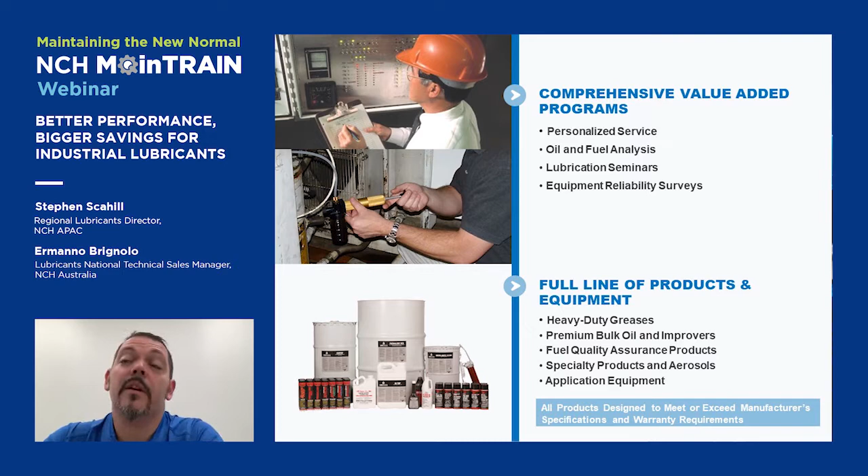And we have some specific products designed for specific applications, and also some application equipment to apply those products to your machinery. We work with a number of different companies that go from excavation, demolition, to concrete, asphalt, mining, quarrying, manufacturing, agriculture, up to something a little more demanding as well, like your food manufacturing, your steel mills, your refineries, paper mills. Pretty much everywhere there's a need for lubrication, we have solutions that can help.

But if you put it under a microscope, all these little asperities become evident. And those asperities sliding onto one another will create what we perceive as friction. Friction is therefore defined as the resistive force that must be overcome when two sliding surfaces or rolling surfaces get in touch with one another.

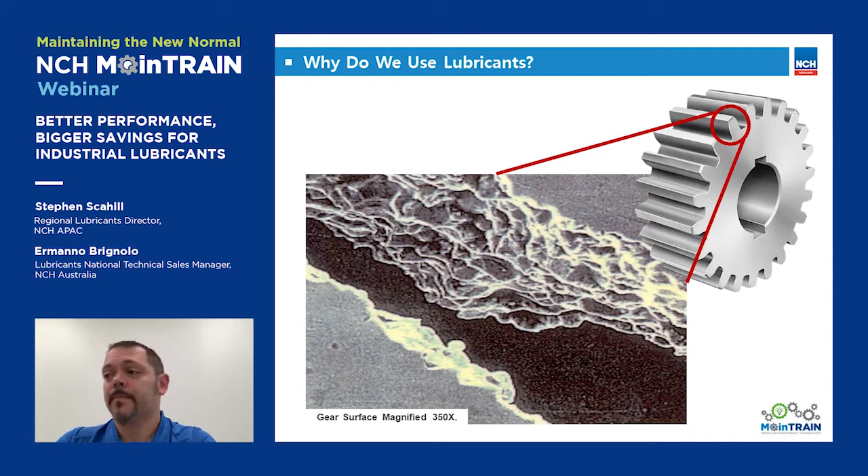Now, friction is not always bad. There are some aspects in everyday life where friction is actually pretty good. Without friction, for example, we cannot walk or we cannot hold a glass. However, in an industrial setup, friction typically is quite bad. Most importantly, its byproducts are quite bad. So let's have a look at how friction becomes a problem.

First of all, there are three different kinds of friction. There's sliding friction that happens when two surfaces are sliding one across the other. There's rolling friction that happens when the surfaces are rolling one on the other, for example, when a cylinder rolls onto a table. And then there's a combination of these two, which is very, very frequent when you imagine, for example, a gearbox.

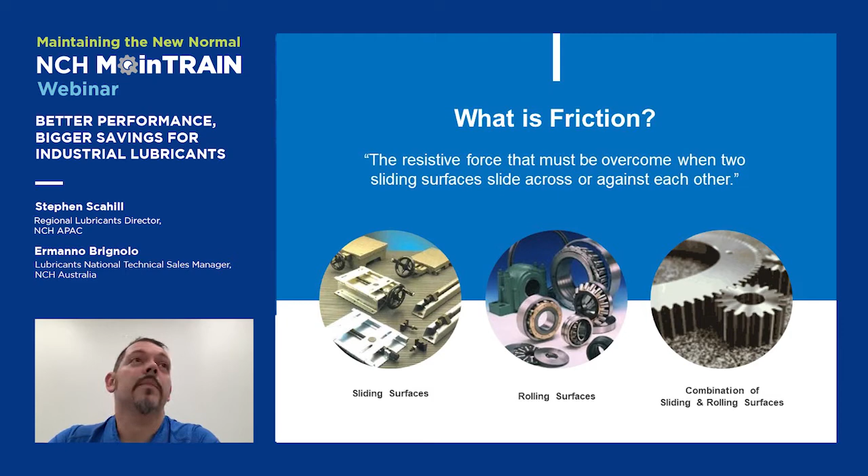Now, there are a few factors that determine how friction is developed. There's load. The higher the load, the higher the friction. There is speed. The higher the speed, the higher the friction. The finishing of the surfaces: the rougher the surface, the higher the friction.

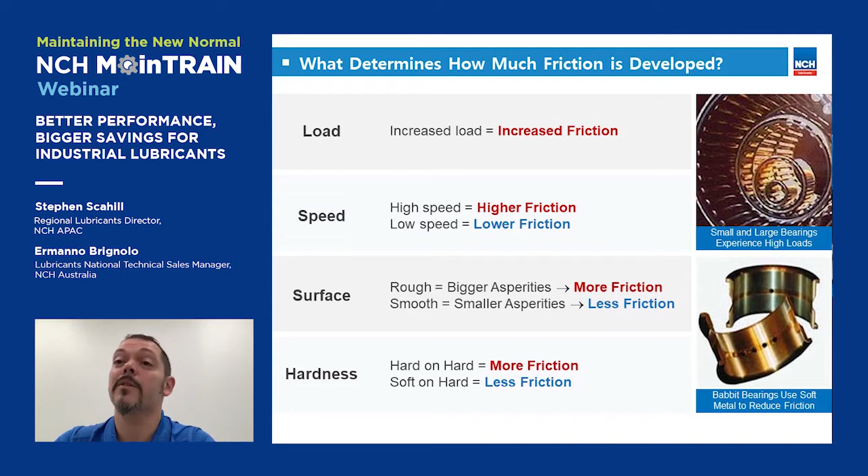And also the hardness. You often have applications where you have two different materials, and definitely the softer material will always wear way before the harder one. And some components are actually designed with that very purpose in mind. So as we said, the problems are the byproducts of friction, which are wear and heat. So let's analyze how these happen and how we can handle them.

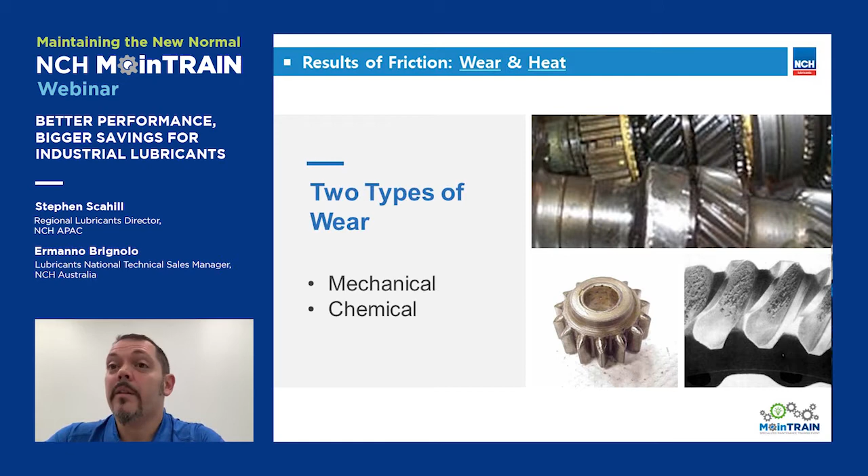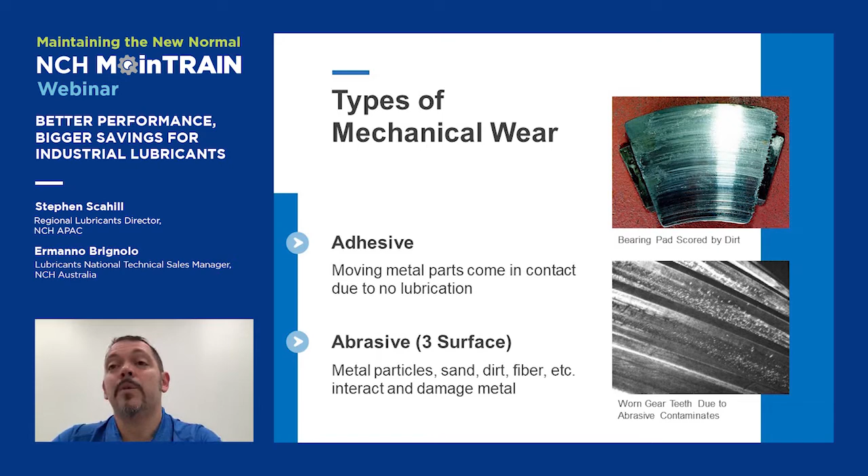Let's start with wear. Wear is divided into two categories. There's mechanical wear and there's chemical wear. Let's see the mechanical wear first. Mechanical wear, again, is divided into two categories. There's adhesive wear that happens when you have two surfaces in contact with one another, and the friction is so high that they actually become glued together. And then there's abrasive wear when you have three elements, the two original surfaces and some contaminants from the outside getting trapped in between and creating a lot of wear, as you can see from the picture.

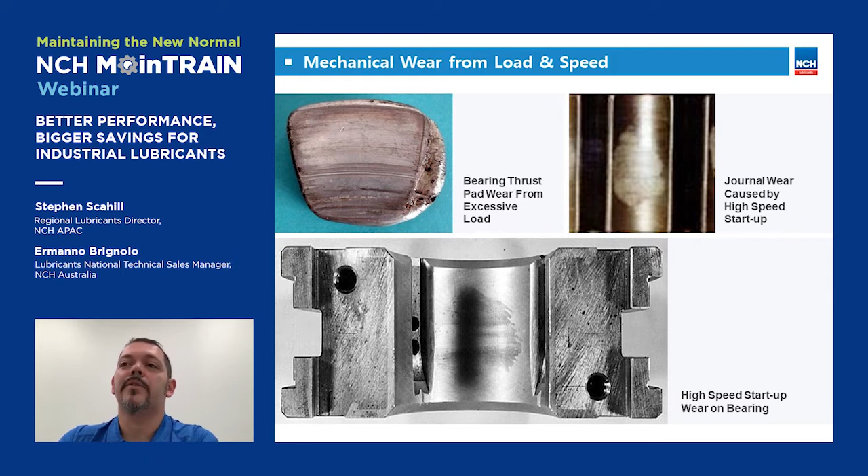And then we move to chemical wear. Chemical wear happens when some chemistry in the lubricant starts to deteriorate and become slightly different. And again, you have two different kinds of chemical wear. There's external chemical wear that happens when some contaminants from the outside get into the oil, for example, and start creating some unwanted effects like rust and corrosion.

And then we have internal chemical wear. Specifically, we're talking about oxidation. Oxidation is a natural phenomenon. It happens when you heat up your oil and sulfur starts to get released in the air. And sulfur mixes very easily with oxygen, creating a gas. The formula is SO3, or sulfur trioxide.

It's not a hazardous gas. It just smells funny. It smells like rotten eggs. And when you start smelling that, usually that's a sign that something bad is starting to happen in your oil. As I said, sulfur trioxide is not bad per se, but it mixes very, very easily with water. At room temperature, it mixes with water and it turns into H2SO4, or sulfuric acid. Now, sulfuric acid is really bad.

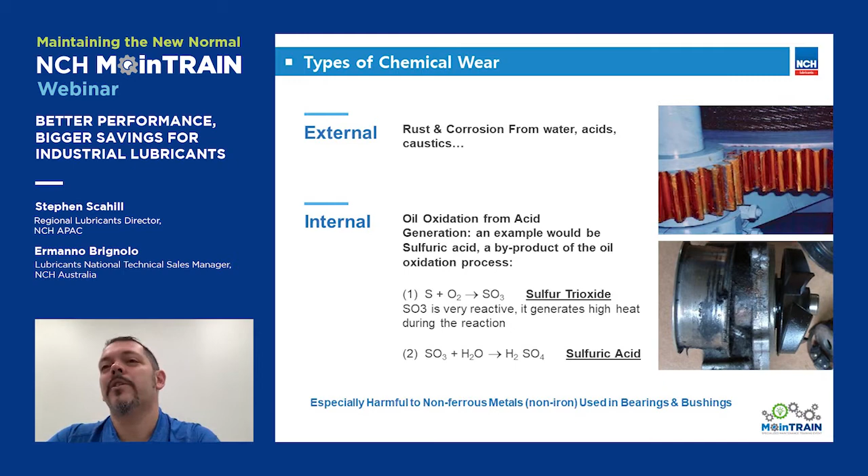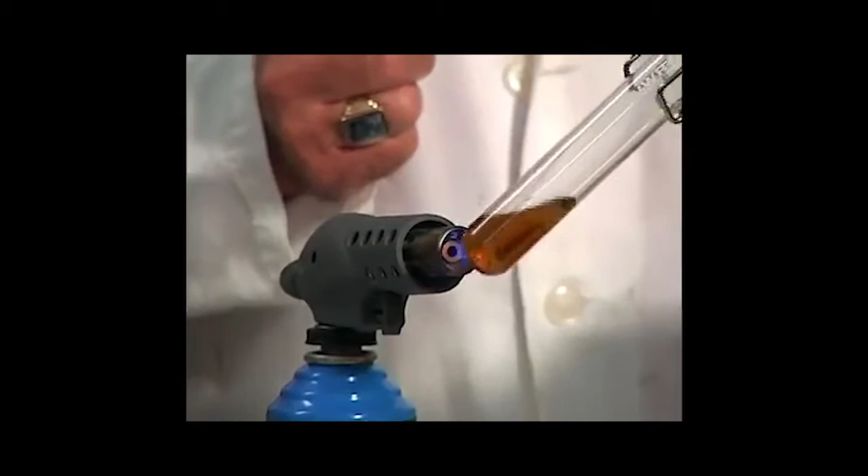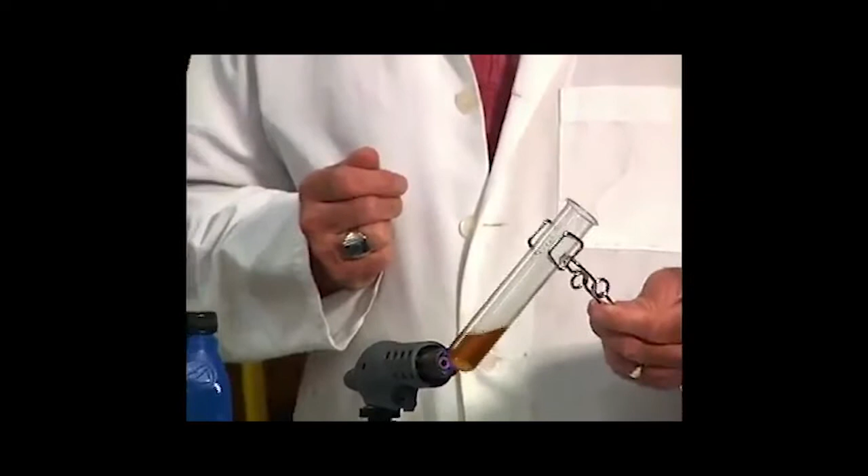And the first thing we're going to see are some bubbles. The oil is doing its job. It's trying to carry the heat away from the source. The second thing we're going to see are light wisps of smoke. This is the lighter fraction of the oil cooking off, going off through the catalytic converter and into the atmosphere. The tree huggers call this NOx and SOx. You and I might call this add oil.

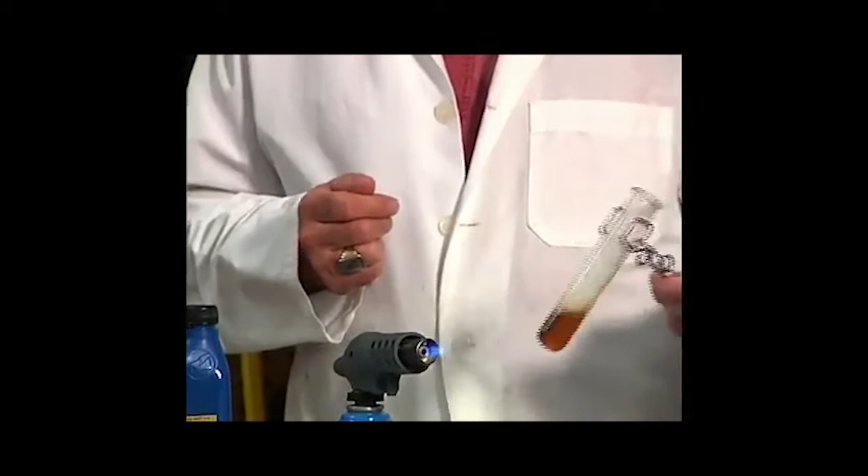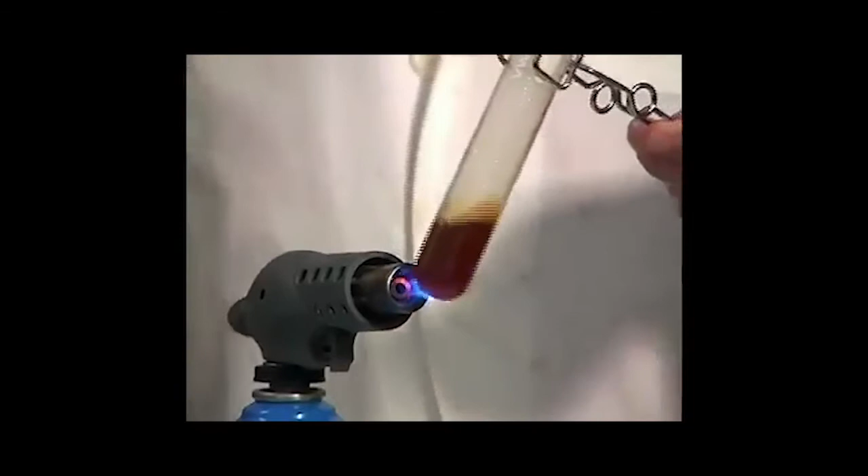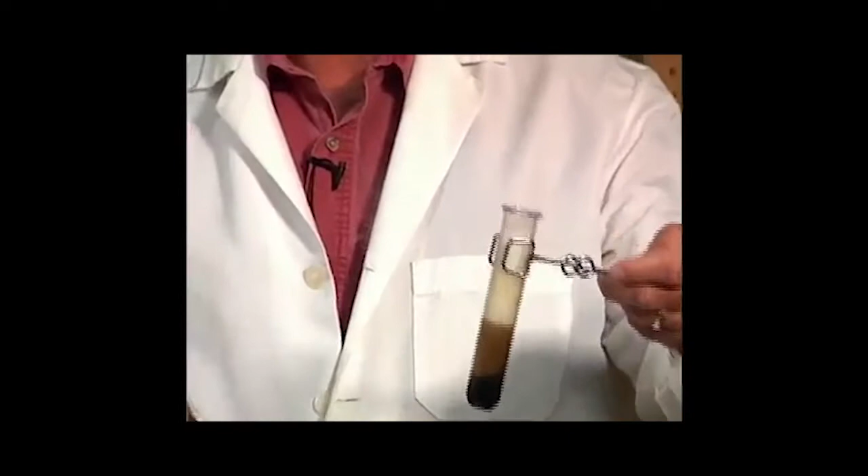As these lighter fractions roll off, it leaves the medium and heavy fractions of the base stock, and then the oil starts to oxidize or thicken. But really, not a whole lot is happening to this oil outside of a little bit of smoke and color. But watch what happens when I add the contamination. Once that oil has expanded and contracted, it's lost all of its alkalinity. So this is how oxidation happens on a very fast scale.

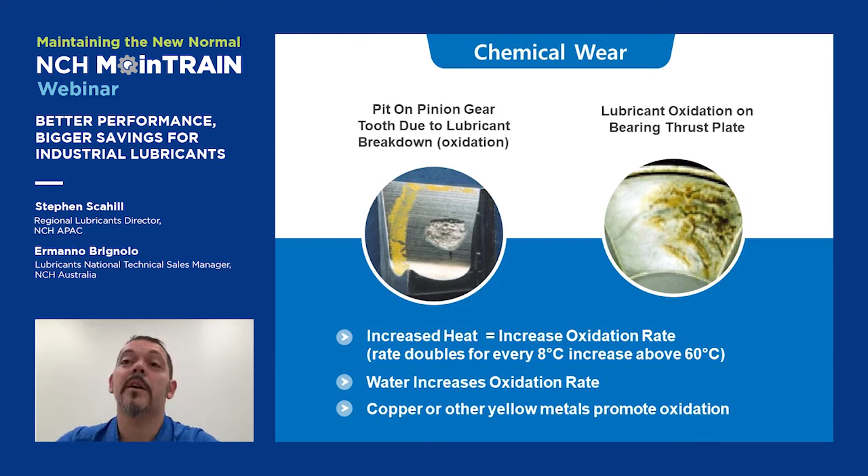Now, we spent a lot of time talking about oxidation, and we said that oxidation comes from heat, and heat is another byproduct of friction, as we said before. So let's have a look at how heat is developed in our system, where it comes from, and what it can create in our systems. First of all, we have 4 types of heat. We have ambient heat that comes from weather, and there's very little we can do about it. There's operational heat that comes from the kind of operations we're running.

If we run a steel mill or if there's a very powerful motor, then temperature is going to be very high. There's frictional heat, which is what we said before. It comes just from friction. When you rub 2 surfaces together, they will heat up, and that heat gets translated onto your lubricants. And then there's heat coming from the load that you have. The higher the pressure between 2 surfaces, the higher the friction, and therefore the higher the heat that can be developed.

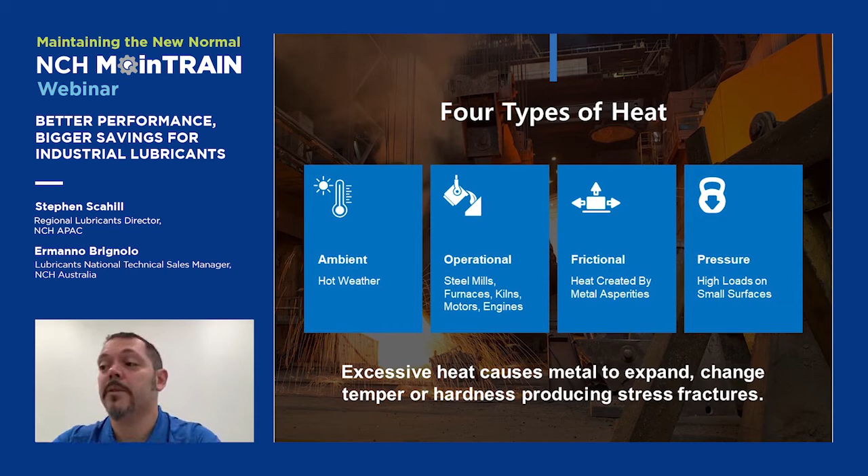And heat itself can also create some problems of its own, like a deformation on the metal. Metal can expand or contract at variation of temperature. And it can heavily oxidize some thin films of lubricant and make them adhere so strongly to the surfaces that you will need to either grind them away or replace the components altogether. So these are all the problems that the byproducts of friction can create in our system. And we said at the beginning that a lubricant is used to reduce friction. So let's see how a lubricant can do that.

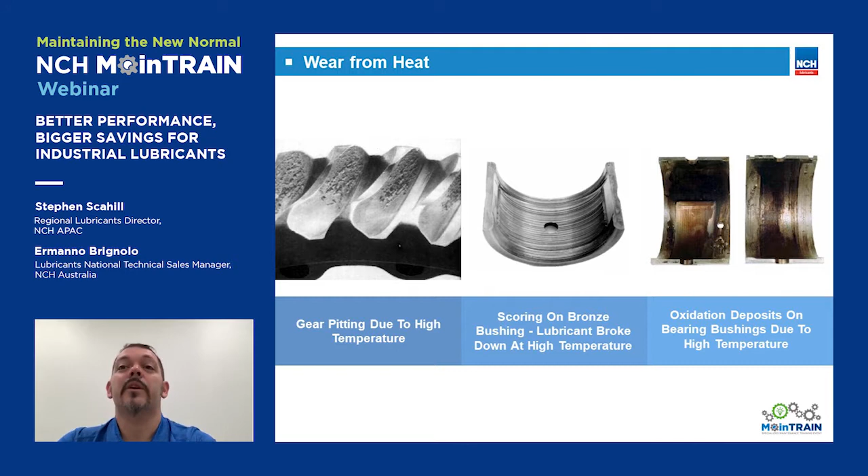From a physical point of view, a lubricant is any substance that can create a barrier between 2 surfaces, and therefore it can separate these 2 surfaces from getting in touch and developing all the friction between one another. And therefore, by doing so, a lubricant also can cover a number of different roles in a machine. Let's have a look at what it can do. First of all, a lubricant is designed to reduce friction. All of them are involved in reducing friction. The first line is quite obvious.

There are some lubricants, though, that are specifically designed to absorb and dampen the shocks, and we are specifically talking about greases and gear oils. Some lubricants are designed to carry the heat away, and of course we're talking specifically about coolants, for example. Some others are designed to prevent rust and corrosion. Every time we see that R&O symbol on the drums or on the boxes, we know that there are some rust and corrosion inhibitors. That happens with almost every one of them.

One lubricant is specifically designed to seal out dirt and contaminants, and we're talking about grease that can create a barrier around our equipment to shield away this kind of action. And there's also one lubricant, well, some of them are involved in this, but one specifically is designed to act as a flushing agent, to keep our system very clean and efficient, and that would be engine oil. Even though, admittedly, all the lubricants that go through a filter have a role in keeping the system clean. And finally, there's one that is designed specifically to transmit power, and that would be hydraulic oil.

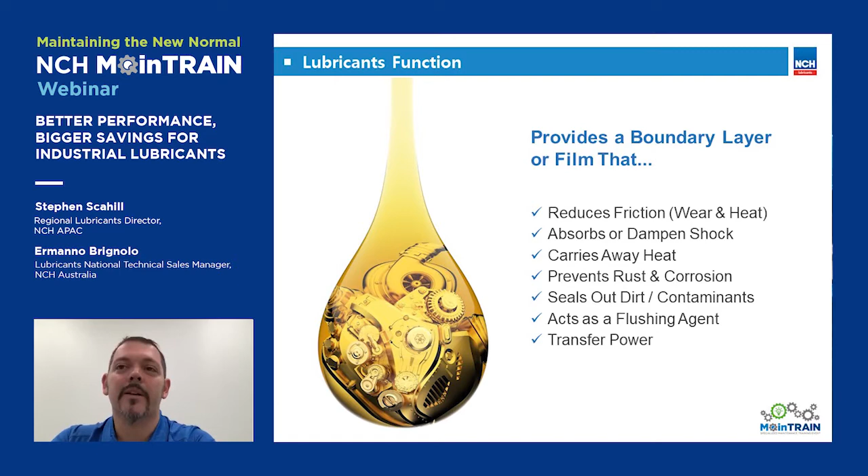So at the end of the day, we are asking our lubricants to do a lot of things, and by doing so, we realize that they are crucial and critical in keeping our equipment efficient, reliable, and highly operational. With that in mind, let's have a look at the process that we have in place to select the right lubricant and the right lubricant supplier. There are many options here that we all are familiar with. The first of which is use the cheapest available.

Now, there's nothing specifically wrong with this, apart from the initial idea, which is reducing a lubricant to a commodity. And based on what we just said, which is heavy responsibility in keeping our machines going and our plant efficient, treating it as a commodity probably is not exactly right. And then there's the OEM recommendation. All the equipment that we have in our plant has an OEM recommendation about the lubricants. And there's nothing specifically wrong with it, again.

The problem is that some of us are still running plants that are probably 10, 15, 20, even more years old. And therefore, that OEM recommendation has been written 10, 15, 20 or more years ago. That means that it doesn't take into account all the technological development that happened during these years. So let's have a look around and see if there's anything better that we can do to keep our machines running.

The famous one, go with what's always been used, which translates into, if it ain't broken, don't fix it, which is fair enough. But I prefer to rephrase that into, if it ain't broken, don't forget about it. As we said before, there's always a chance that we can do something better. So let's keep our eyes open for something that can help us achieve a better result. Use the corporate suggested product.

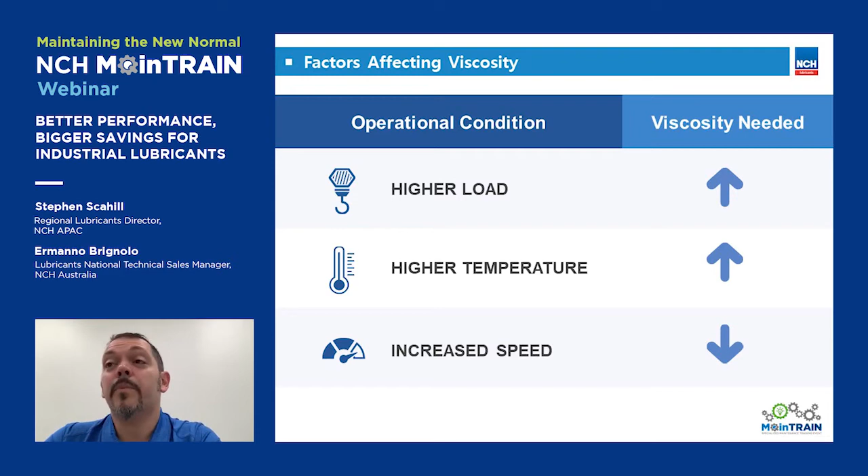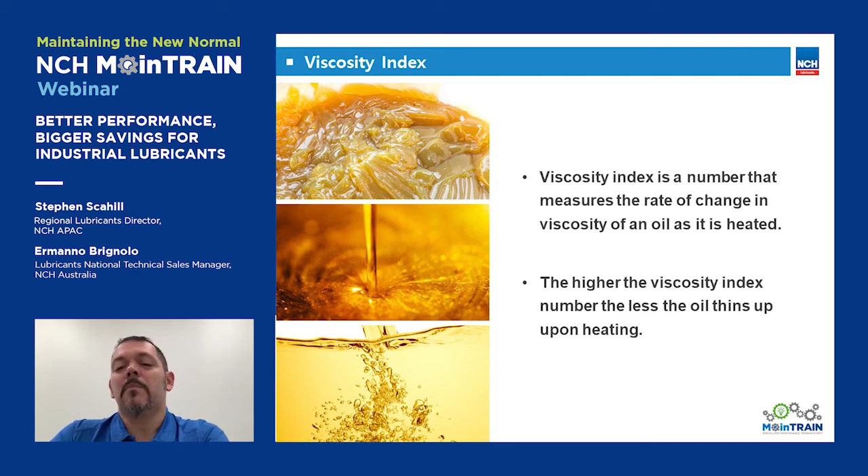Apart from viscosity, there's another parameter that often is disregarded or neglected altogether, but it's very, very important in defining the performance of our oil. It is the viscosity index. Now, let me be clear on this aspect. Viscosity index is a number. There's no unit of measure, and it's a number that defines the ability of an oil to keep the viscosity within a certain range while the temperature changes. So the higher the viscosity index, the smaller the variation will be in the viscosity grade.

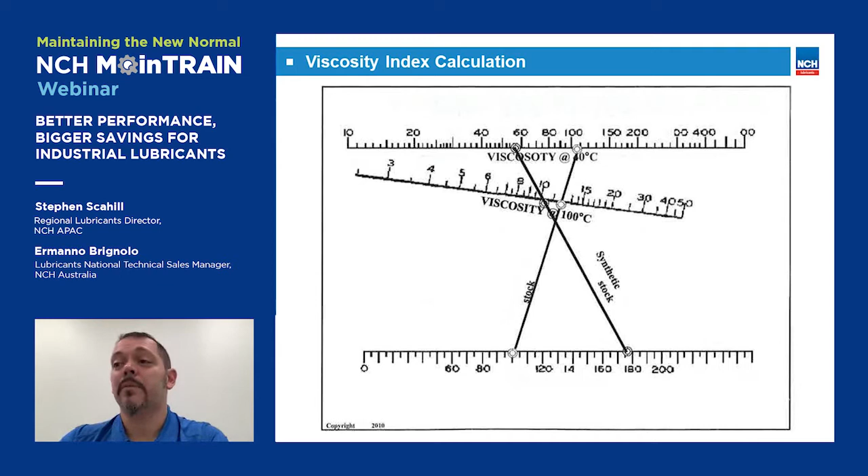Now we finally go into the analysis of the base oils, which are the foundation of all our lubricants. And as we know, base oils are divided into two big categories. There are mineral base oils and synthetic base oils. So let's analyze for a moment the difference between these two.

Now, what we extract from the ground, the crude oil, is of course not usable directly as it is. It needs to undergo a quite complicated process that we're going to see very briefly. Now, crude oil cannot be used as it is when it comes out of the ground. That's why we have refineries. They are those big plants with high towers and fires burning on the top of the towers.

Crude oil goes into the plant, gets boiled up, and then the gases coming from that furnace get condensed at different temperatures. What comes out at 260 degrees from the atmospheric distiller then goes into the vacuum distillation process, and from that we extract all of our lubricants, our heavy oils, our light oils, our synthetics, and even some gases that then will turn into lubricants again.

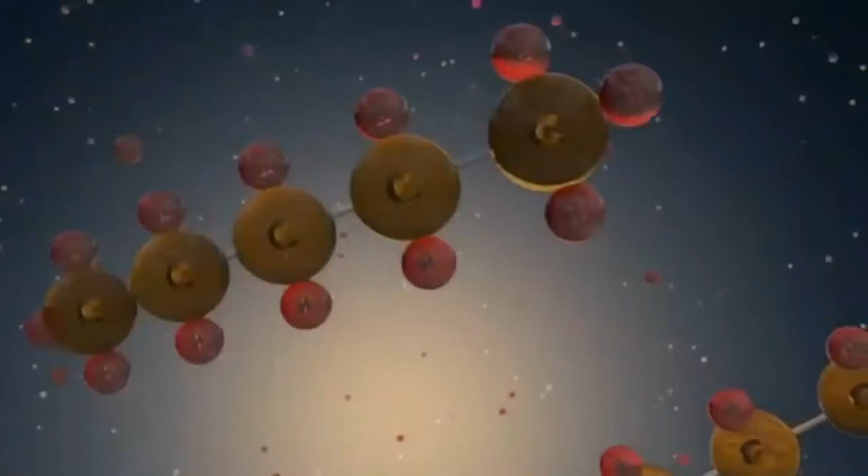And then what comes out of the vacuum distillation is divided into groups or categories based on two parameters, the sulfur content and the viscosity index. And these are the differences between our minerals and our synthetics. We have 7 groups of lubricants, of base oils. Groups 1, 2, 2 plus, and 3 are typically our mineral oils, which have a relatively low viscosity index and a high sulfur content.

And then group 3 plus, 4, and 5 are our synthetics. Very difficult to make distinction between groups 3 and 4, but the important thing is synthetics are all with a very high viscosity index. And again, let me stress that they all come from petroleum, from the crude oil.

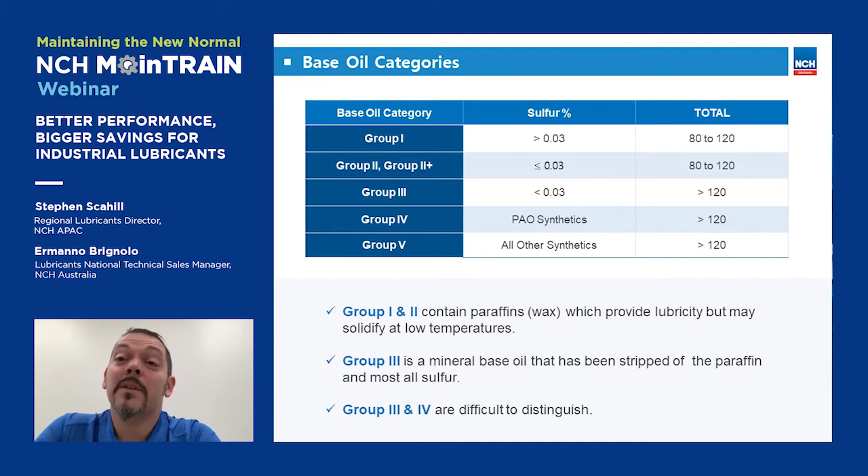Now there's a sort of a myth or a common conception that synthetic oils are always better than minerals. Let's see if that's exactly true. There are some distinct advantages in using synthetic base oils. It is true that there are some advantages using synthetics, yes.

Specifically, synthetic oils have improved thermal and oxidative stability because they have a higher viscosity index. And they also have a higher viscosity index, so this is a bit of a loop. And finally, they have improved extreme temperature properties because they have a higher viscosity index.

On the flip side, though, they are also very expensive because it's much more complicated to process them and to refine them. They do not provide the same lubricity as mineral oils, and they cannot use some performance additives that are crucial for some operations. And finally, they tend to emulsify with water very easily. So you need to keep them extremely dry. Otherwise, you will have a nice pot of milk instead of a nice reservoir of oil.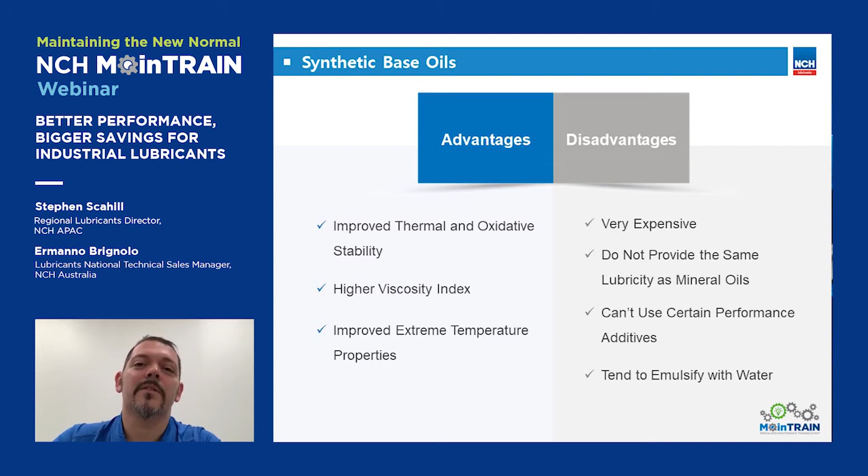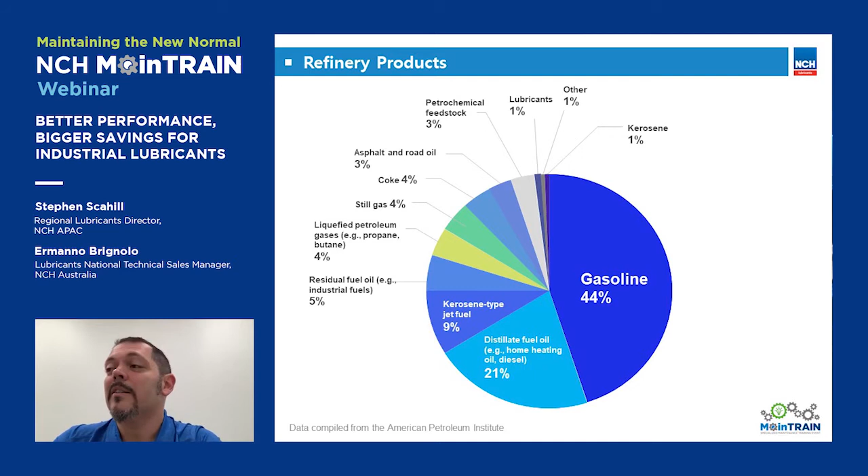And finally, let's have a look at the volume of lubricants that come out of a refinery. Just to have a quick idea, if you look at this picture here, the lubricants are the tiny little purple slice that is less than 1%. So all coming out from the crude oil goes into different applications like your plastics, your asphalt, bitumen, gases, fuel. Fuel is the vast majority of it. Lubricants are the tiny little slice that for some manufacturers is a necessary evil.

And now out of that 1% that comes out of the refinery as base oil, we can manufacture different kinds of lubricants. If it's just base oil plus some additives, we have our lubricating oils. And if we have base oil plus the performance additives plus a little bit of thickener, we have greases.

Now we all know that if we take a grease cartridge and we turn it upside down, hopefully nothing happens. And that's because of the thickener. And with this in mind, the fun fact is that the percentage of the thickener inside a tube of grease is something between 2 and 3%. That's more than enough to turn your oil into a grease that can stay attached to a surface without slinging off.

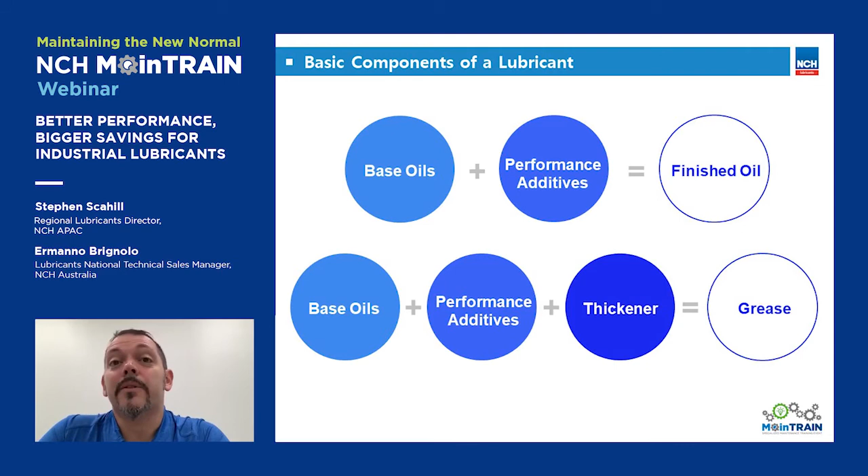The most important components of our lubricants, though, are the performance additives. So let's have a look at what these performance additives do. We have 4 categories of them. The first are friction and wear-reducing agents. There's oxidation inhibitors that are designed to handle the oxidation process. There's rust and corrosion inhibitors that are designed to handle the external wear.

There's acid neutralizers, there's anti-wear and EP additives that we see in our gear oils, and there are shock load reducers in our gear oils and greases. Then there are some additives that are designed to handle the temperature problems. So we have the pour point depressants and viscosity index improvers, and in greases specifically we have the heat reversion thickeners, your aluminum complex, for example.

Then you have your solid additives, your moly, graphite, Teflon, calcium sulfonate. These are in a solid form. They are typically powders. They get mixed into the grease to help the lubricant withstand higher load conditions.

And then you have your functional additives that specifically handle problems that are related to some functions. For example, seal conditioners, leak inhibitors, adhesive and cohesive polymers, your detergents and dispersants in your engine oils. All these additives make the difference in the performance that your lubricant can provide, and therefore will deliver a much better quality in the lubricants and a much more reliable workability of your machines.

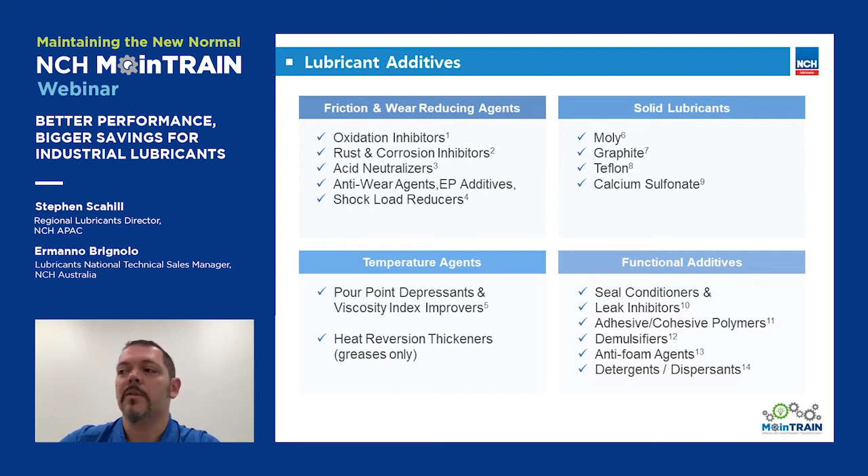Finally, let's have a look at the family of the lubricants that come out of this process. You have your greases that are designed to seal out dirt and contaminants, protect, and lubricate. You have your gear oils that have the added function of cooling. You have your hydraulic fluid that needs to transmit power, but also needs to cool some systems, and needs to protect your parts. Motor and compressor oils that act, as we said before, primarily as flushing agents.

You have your surface lubricants like your moly, your dry lubricants, your Teflon, your open gear lubricants, your anti-seize. And then you have your penetrating lubricants like your chain lubes, your wire rope lubricants, your release agents.

Finally, let's have a look at how the lubricants have a direct impact on your maintenance costs and potentially your maintenance savings. The graph that you see here is an average snapshot of what the maintenance costs look like on average in a manufacturing company. Now, let me be clear, there's no one company in the world that has these numbers exactly. This is an average that comes from an investigation we did on well over 100 customers of ours.

And we have found out that before they switched to NCH, the cost of lubricants was 2% of the total. The labor cost, so the labor associated to handling breakdowns and downtime, was 26%. 20% was the actual cost of the downtimes, 30% was the parts replacement, 1% is the waste oil, and energy and fuel consumption summed up to 21%.

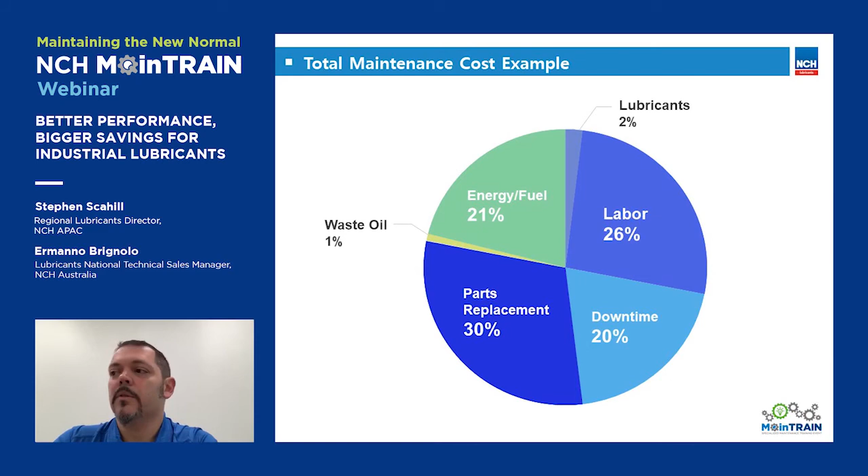Now, the interesting part is noticing what happened to these companies when they moved from standard lubricants to advanced performance lubricants. The first thing to understand is that none of the slices disappeared. We still have labor costs, so nobody lost their jobs because the company went to better lubricants, but the incidence of those costs on the maintenance was reduced from 26 to 23%, saving 3 points. Same thing happened to downtime. It didn't disappear, but it was contained from 20 to 14.

Parts replacement, same thing, went from 30 down to a whopping 22%, so saving 8 points. Waste oil remained pretty much unchanged, and energy and fuel consumption went down from 21 to 18%. The only slice that grew a little bit is the lubricants cost. What that means is that by investing a little more with lubricants and moving that slice from 2 to 3%, these companies have been able to save 19%, which on a total of $400,000 a year, means $76,000 saving just because they adopted better lubricants.

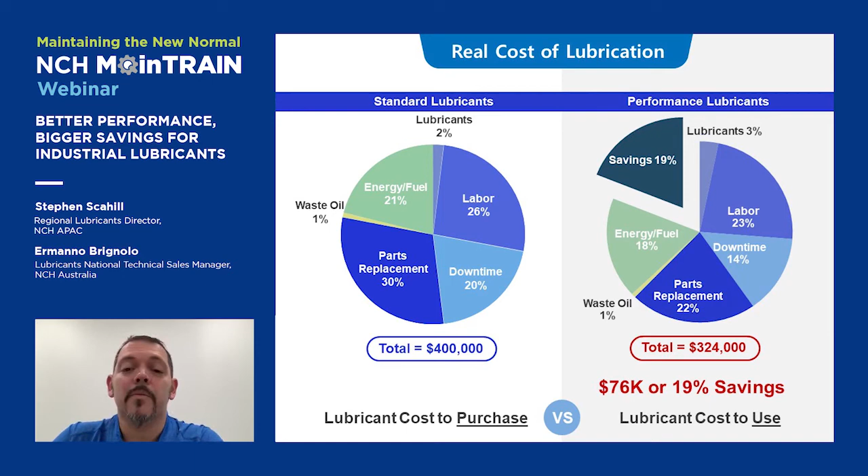Now, at this point, we understand the process to select the lubricants and the implications of that choice on our maintenance costs. So let's have a look at a real-life example of how the right lubricant can make the difference in the performance of our equipment. So you just heard from Ermanno on some of the theoretical side of things with the slides, why we use lubricants in the first place, some of the common issues that I'm sure most of you face, and also why we use higher performance lubricants and what benefits they can have.

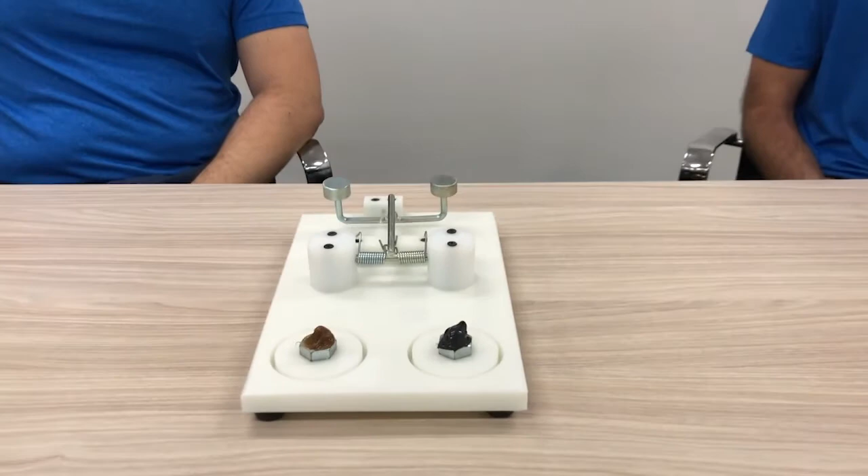What we'd really love to do now is show you more of a live demonstration of one of our key products, our Primolube grease, our #1 selling lubricant. And we want to show you a couple of live tests around 4 main areas. One of them is heavy load conditions, the second being heat, and the third being contamination of water and airborne particulates. And you can see we have a contraption here. This is related to a heavy loads environment, and Ermanno is about to show you the grey grease, which is our Primolube, and a Brand X competitor's grease, and how they perform under a high load condition. So Ermanno will start.

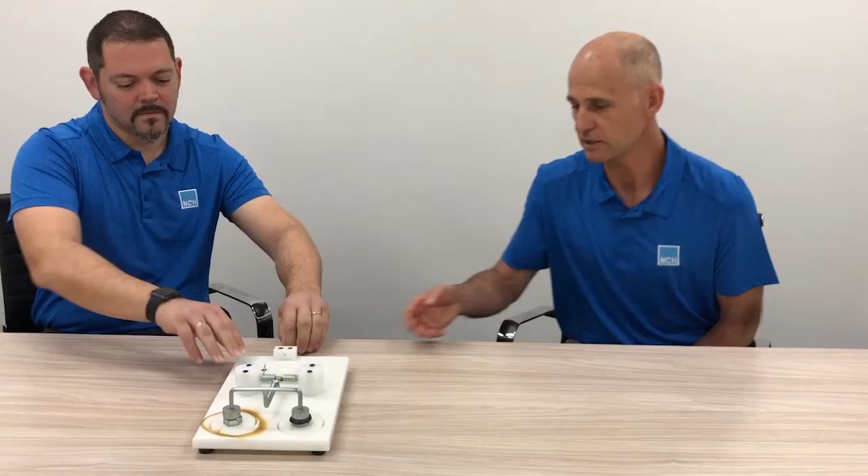So we can see straight away quite a clear difference. If you zoom in a little bit, I'm also going to just pull this away, and quite evident you can see the difference where the Primolube really stayed in place. The other grease has really splattered out, and you can see the steel exposed, so it's not performing to lubricate where the metal to metal contact is.

And if I take a little bit of the product, put it on my finger and just move it up and down, you can see the reason it works so well is it has adhesive and cohesive polymers. Adhesive sticks to my fingers or sticks to the metal. Cohesive sticks to itself. And that really helps the grease stay in place under a high load condition.

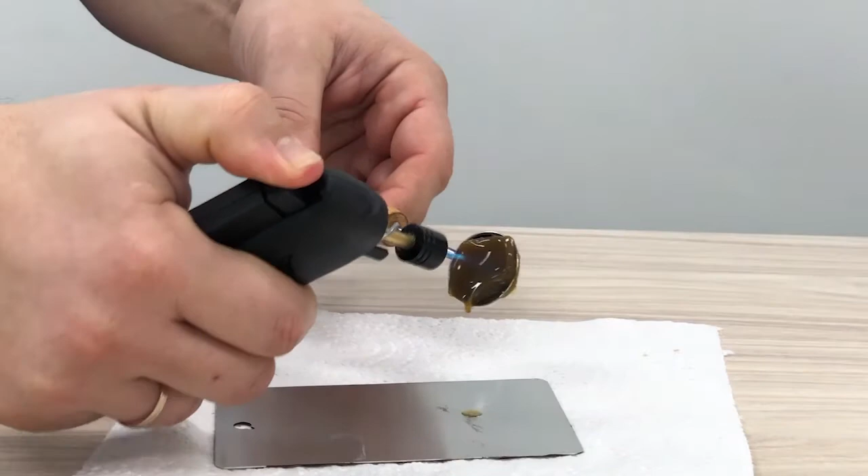So the second test we're going to look at now is for heat. So we're going to stress test the grease with high heat with a little butane torch. And again, we have the Primolube grease and our competitor's grease, and Emano is going to put this demo to work right now. So we're melting the Brand X grease first. And you can see quite quickly the grease melting off, dripping.

And then we work on the Primolube grease. Same conditions, same amount of heat. What you'll notice straight away, it takes a little longer for the grease to melt, but it is designed to melt above the threshold temperature. So now it's starting to melt and drip off.

Okay, great. So if we get the camera in here, what we're most interested in is the grease that has melted. So if you look closely, hopefully you can see it looks a little different. The brownish grease has gone more like a candle wax kind of consistency, whereas the Primlube grease has remained still the same grease as it was before, the sheen and everything on it.

If I then, now that it's cool, dip my fingers in both of them, you will also see that the Primlube has retained the tackiness and the brown grease has lost a lot of that stickiness. So what we have unique to NCH Primlube grease, or unique to an aluminium complex grease, is what we call heat reversion. So the grease, once it lowers below that threshold melting temperature, returns to its original state and is still good to be in the bearing and in the same condition to help reduce the consumption of grease.

So our last issue is contamination. We talked about two types of contamination that most everyone has to deal with. First being water or wet environments. So we're going to get Amano to show you how this works with our Primlube grease. Okay, so we're just going to take some of the Brand X grease to start with, pour water, and he's going to rub it together to attempt to mix the grease and water together.

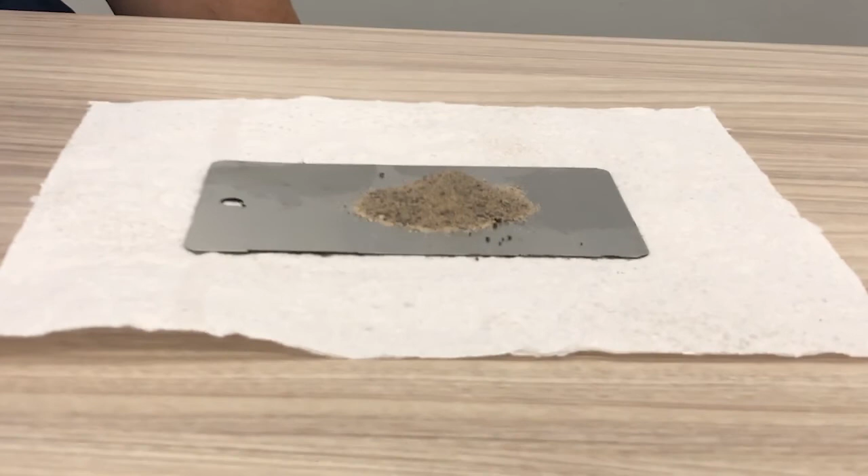Okay, so our final demonstration is around contamination, our solid contamination. So for an example here, we have a pile of sand. This could be sand or dirt or grit that gets into the grease, forms what we call more of a liquid sandpaper. So Mano's going to show you a little demonstration. So we take a dollop on each index finger, the Brand X and the Primlube, dip it into the sand contamination here, and then really rub index finger and thumb together to mix the grease and the sand together. This one is a little difficult; normally we get our customers to do this to feel it.

But what's happening here, with the brown grease, typically, and I did this one before, so I know the feel, it feels sharper. You can feel the sand grits much more. With the Primlube, the sand will stick to grease. Grease is grease, and the sand will stick. But with Primlube, it tends to coat. The additives will coat the particles of sand or dirt, and it softens or lessens the grinding impact. So that's why it feels softer on the fingers, and therefore in the equipment it has less impact for wear on the equipment. Okay, so that's the demos we wanted to show you.

Thank you, Amano, for the products, and I'm sure you can see quite clearly illustrated the difference between a premium grade grease and a more generic grease with our Primlube. At NCH, we're very aware of the day-to-day issues and problems that our customers face in the field in real life, and all our products are designed to combat those problems. End result, in particular for grease, a reduction in consumption, and more importantly, the larger savings opportunities around reduced downtime, labour costs and parts replacement.